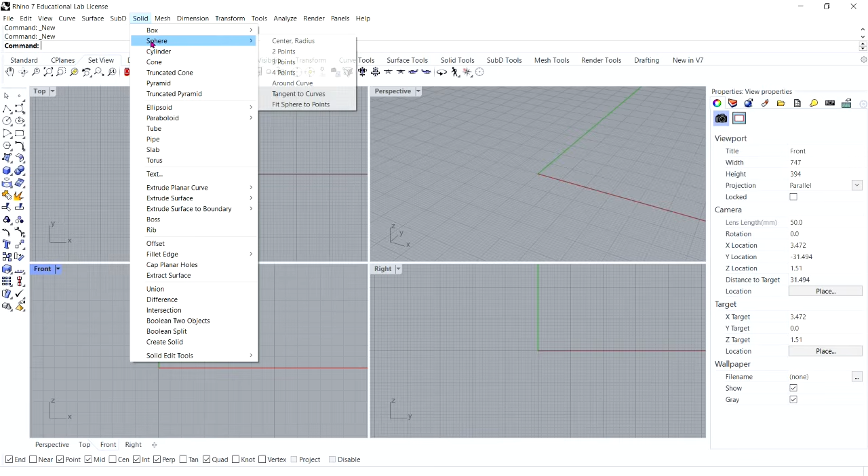So let's go ahead and begin in our front viewport. And you can either access the command from here, which is sphere, center, radius, or you can come up here and go to solid, sphere, center, radius. And in this case, for demonstration purposes, I'm going to start at the origin point with grid snap on, just to make my mirror command a little bit easier later down the line.

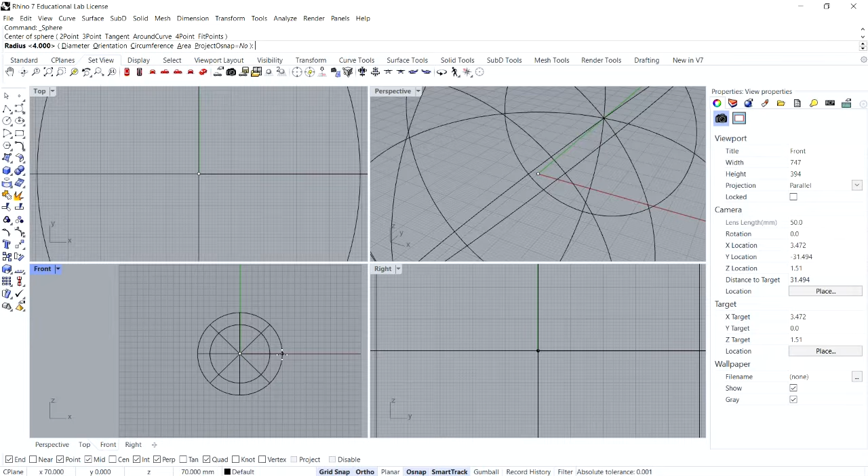Now, the exact size doesn't necessarily matter. That's kind of case-by-case basis. And I'll go ahead and take this to rendered in my perspective viewport so I can see what's going on. And here I'll go ahead and take that to shaded so I can also get a sense of the forms that I have going on right now.

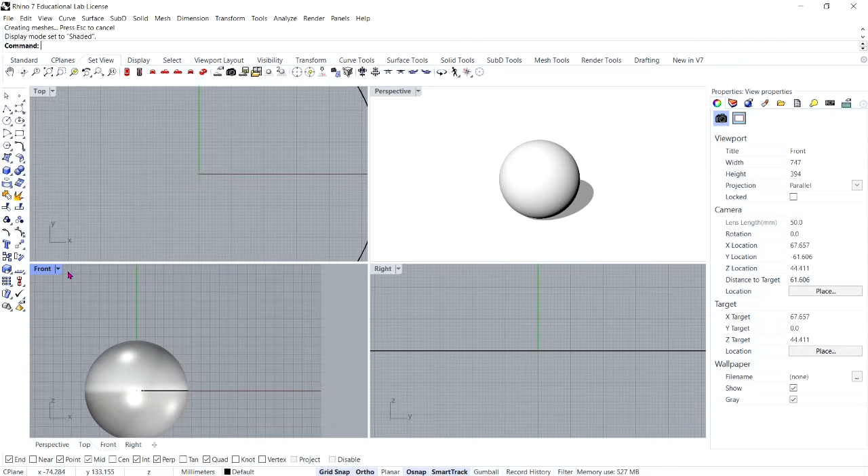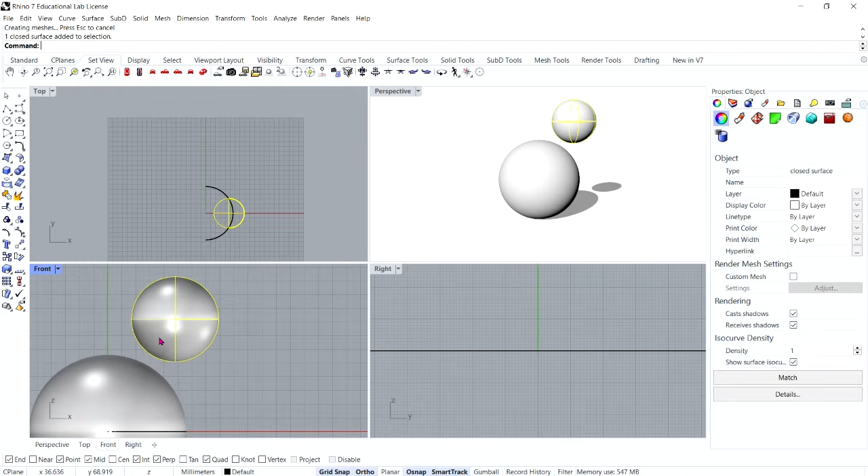And then my next step is going to be to repeat this procedure to create a second sphere. And my second sphere is going to be a little bit up and to the right. This is going to be the head of the duck. Like so. Okay, and then you can kind of see what you've done in your perspective viewport, and you might move things if you need to at this point, trying to get it closer to the body.

And I'm going to go ahead and use my elevator mode to make sure things don't move too far in the wrong direction. Okay, there we go. Now, the next thing we're going to do is to deform these spheres so that we can kind of mold them digitally to take on the physical properties of this rubber duck.

So now go ahead and select both of your spheres. You can multi-select with Shift, and then go ahead and go to the Edit menu and select Rebuild. And in your Rebuild Surface prompt box, you're going to change the point count to 8 for both U and V. Like so. And then go ahead and change the degree to 3 if it isn't already set for U and V as well.

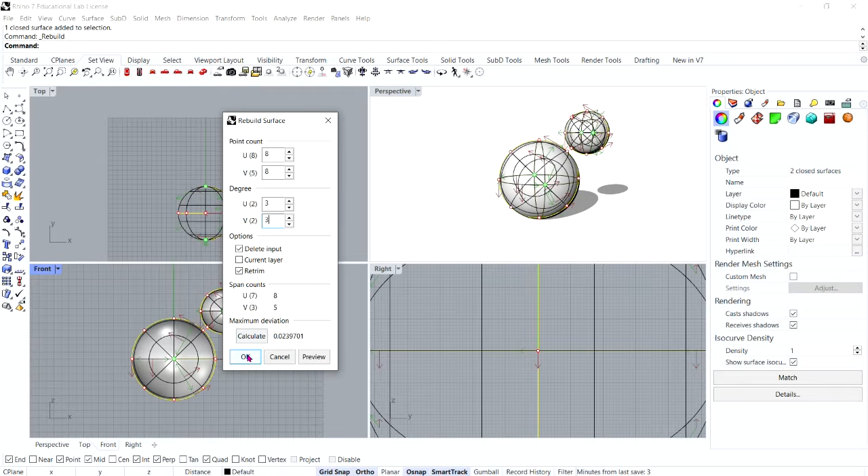Next, check Delete Input, clear current layer, and then click OK. There we go. The spheres are now deformable. Having more control points allows more control over smaller parts of the surface. A degree 3 surface will have a smoother shape when deformed.

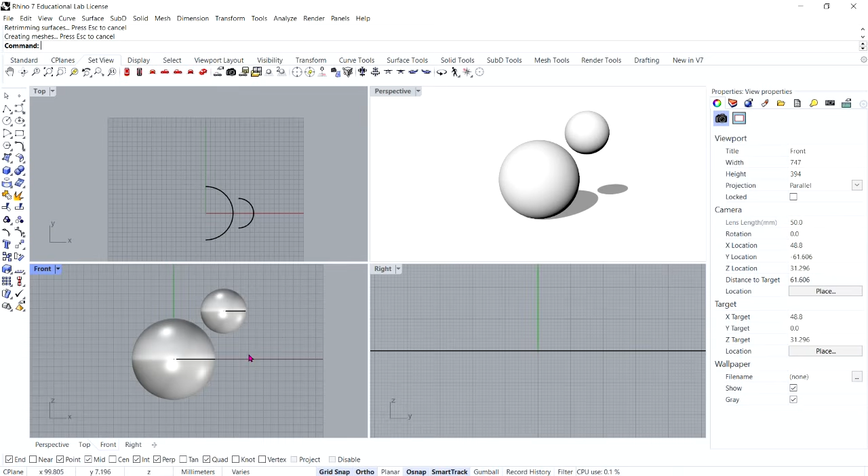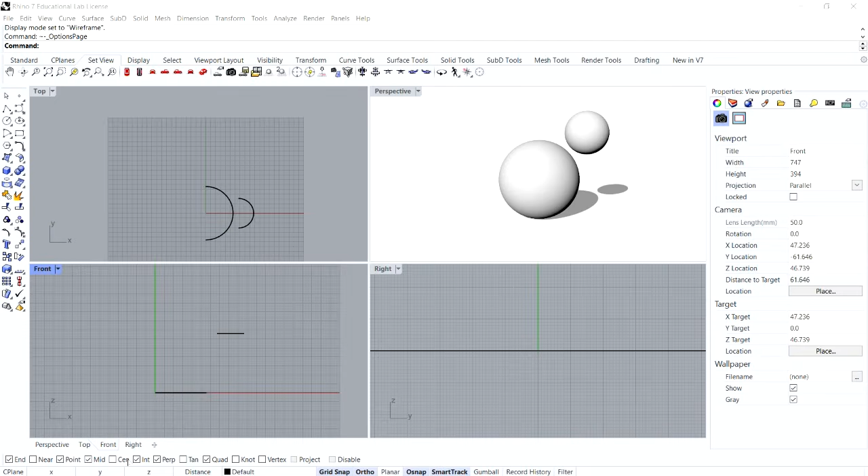All right, now I'm going to go ahead and work in my front viewport, and I'm going to change that to wireframe. And it's important to be able to see the ISO curves for the following steps. So if you don't see them, what you can do is click on the pull-down menu in your viewport title bar and scroll down to Display Options. And once you get your Rhino options dialog box, make sure show ISO curves is checked, and then hit OK. And now you can see those ISO curves that again are going to be important for the following steps.

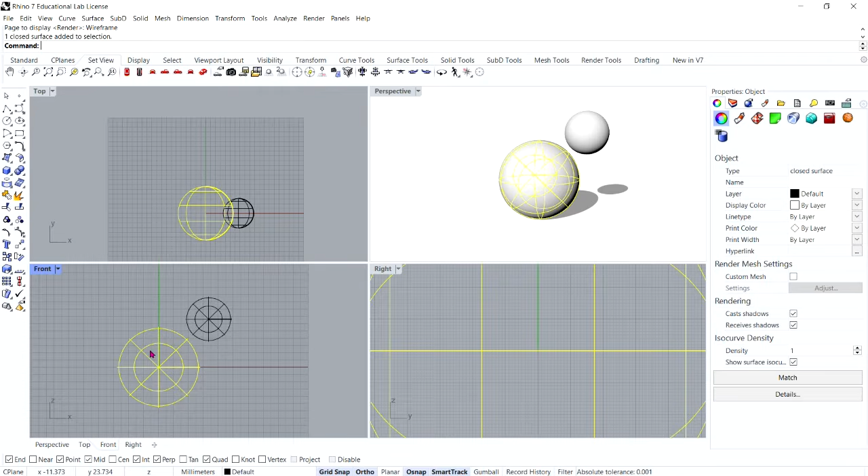All right, so let's go ahead and select the large sphere. And then from our edit menu, click control points. And here we want them on, so go ahead and turn control points on. And notice the shortcut key for control points is F10. All right, so now we can clearly see our control points for our larger sphere.

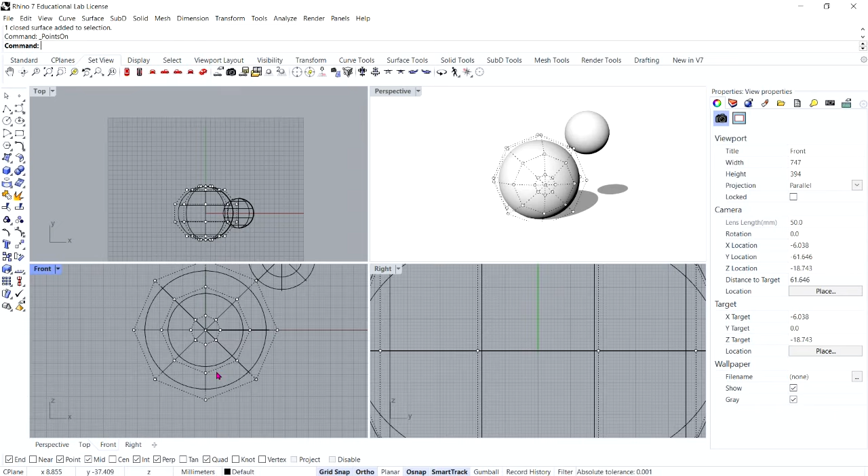Now, in the front viewport, select the control points near the bottom of the sphere. And you can do this with a window selection like so, and select all of the control points, once again, that are near the bottom of the sphere. So do not grab the control points that exist in the exact center.

Now let's go to the transform menu. And now click set X, Y, Z coordinates right here. In the set points dialog box, check set Z, this one right here, and align to world like you see here. And then go ahead and uncheck set X and set Y, and then click OK.

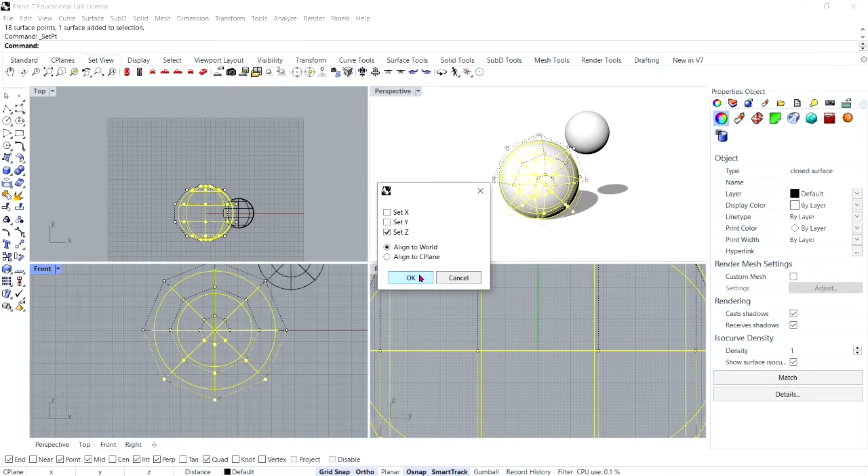Now you can go ahead and drag these selected control points up, and you can snap to one of the uppermost selected points like you see here, right? And now we've essentially flattened the bottom of that sphere.

All right, moving on. Now I'm going to go ahead and turn off the control points: Edit, Control Points Off. And the next thing I'm going to do is scale the sphere shape in one dimension. I'm going to make it larger. So I'm going to go ahead and select my larger sphere, and then from my Transform menu, I'm going to select Scale 1D.

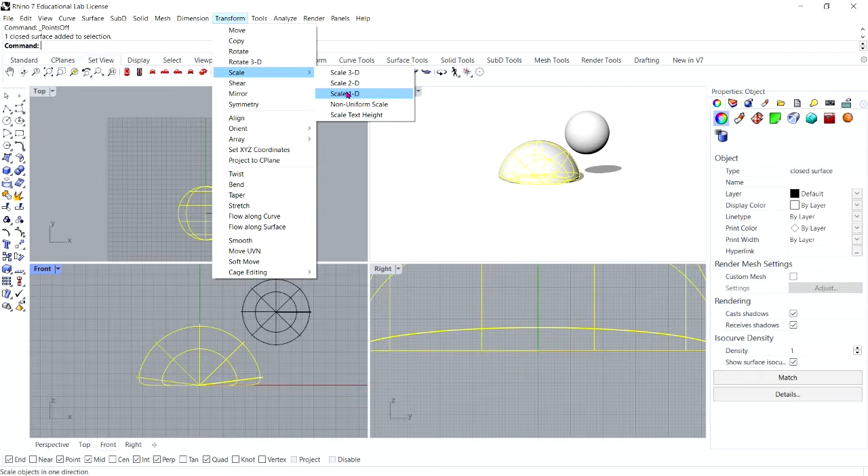For the origin point, pick a point near the center of the body of the sphere. For the first reference point with ortho on, so make sure ortho is actually on, pick a point to the right in your front viewport. And then for the second reference point, pick a point further to the right in your front viewport to kind of stretch it out like you see here. Get a little bit larger, like so. Now you'll see the body is shaped like an ellipsoid.

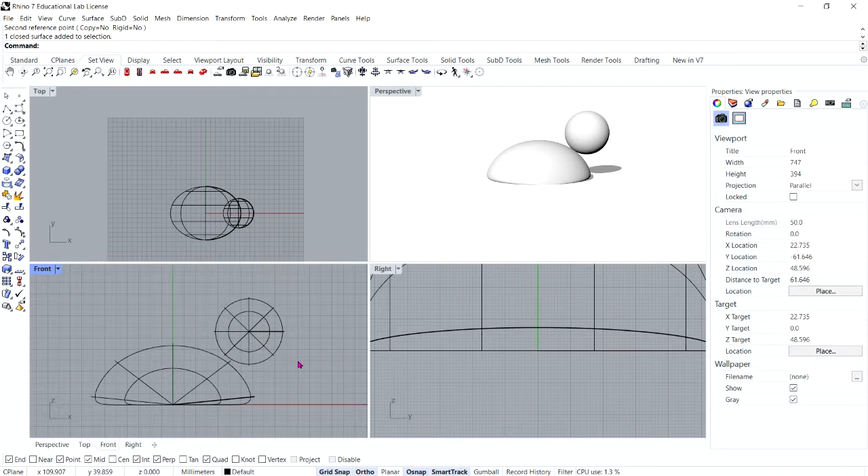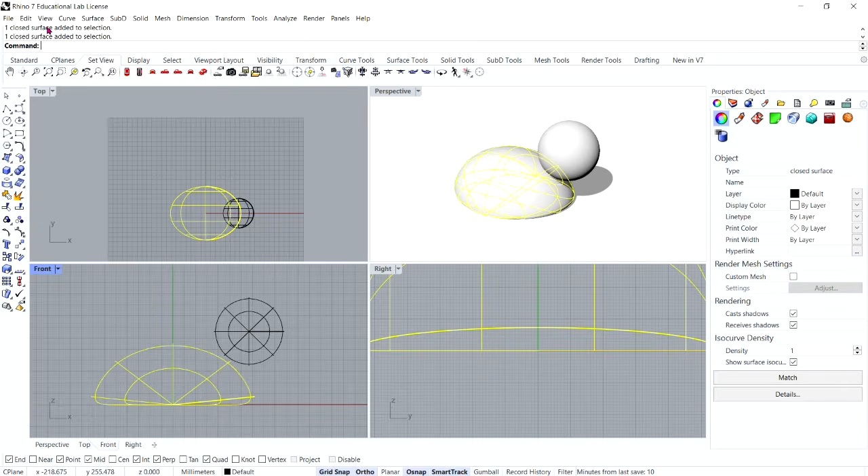All right, moving on. Now we're going to reshape the chest and the tail. And notice as I'm working that I'm keeping my perspective viewport open so I can clearly see that things are being modeled as I intend them to be modeled. So once again, turn your control points on. Select your large sphere on the bottom, and then Edit, Control Points On.

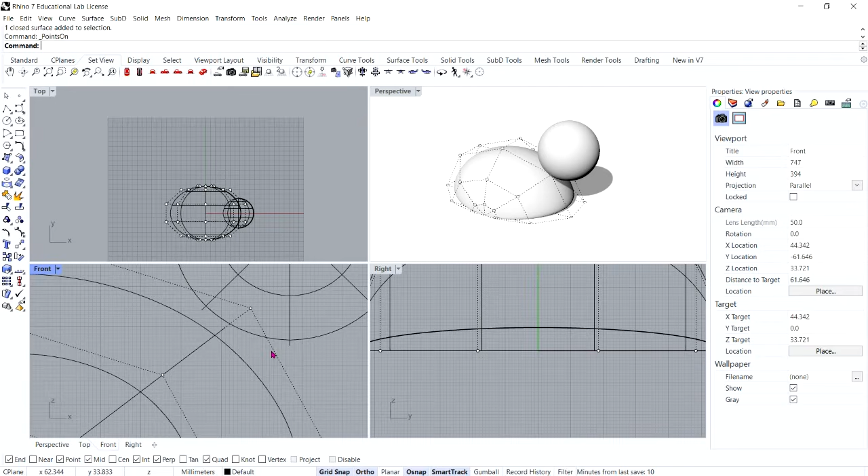Now you're going to window select the control points at the top right of the body, and you're going to drag them to the right to bulge out the chest. So you're going to do a bit of a window selection here to grab those control points, and I accidentally selected the smaller sphere on top, so I'm going to deselect it using Control. And now drag them to the right to bulge out the chest of this rubber duck.

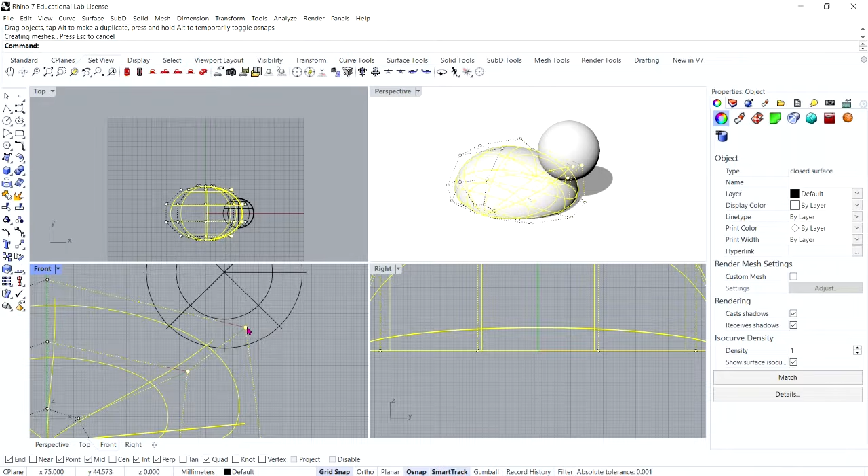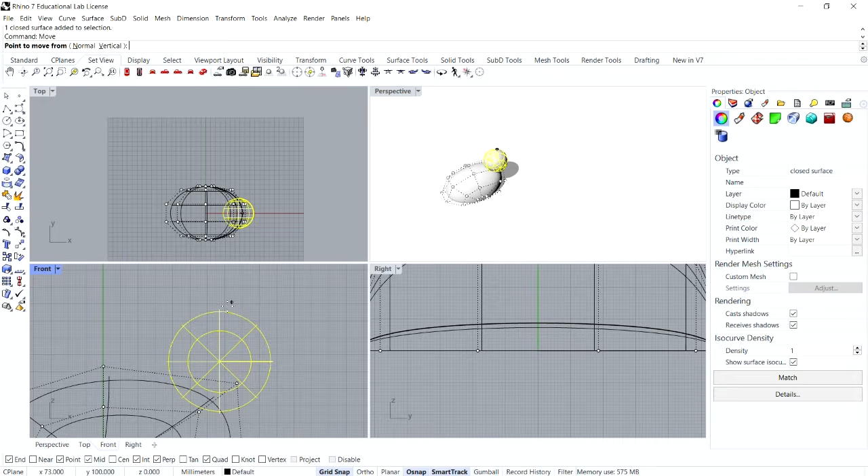And my ortho is on, so I'm going to turn that off so I have a little bit more liberty here with my movements. There we go, and I'm going to check to make sure everything is copacetic in my perspective viewport. Okay, we're good. Now I'm going to move this guy around just a little bit so it's not going directly into the body of the duck, and turning ortho back on to make sure I don't lose my alignments.

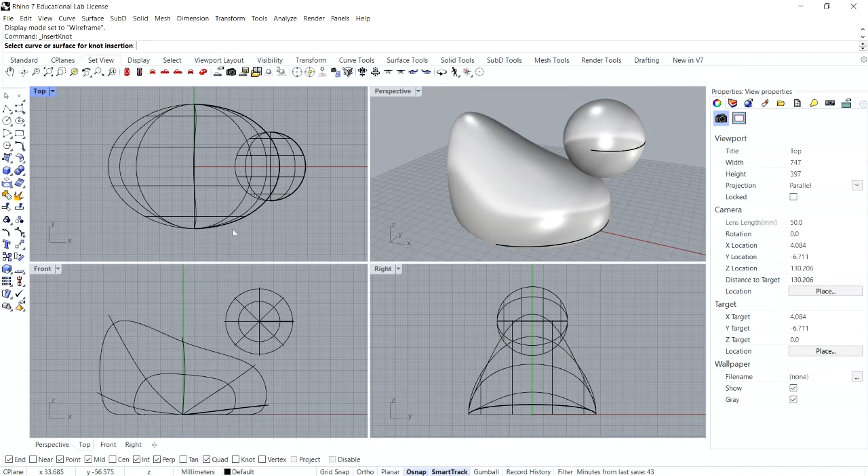Next, we are going to be adding control for further shaping the tail. Before we start to edit the tail further, first we're going to need to add an additional set of points to the tail portion of the body. So from your Edit menu, select Control Points and then Insert Knot. For the surface for knot insertion, pick the body surface, like so. And you're going to want to make sure that you're inserting this in the V direction.

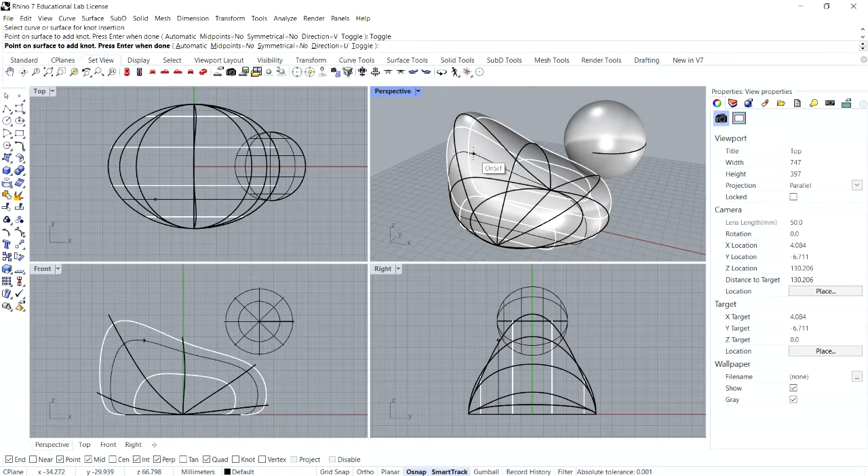It's highlighted right now as white. If it's not, yours might look like this, and you'll see the direction has changed. So we need to make sure that it is actually going in the V direction. So change the direction if necessary until it reflects what you see here on the screen. And then pick a point that's midway between the tail and the center of the body, just like this. And then right click to finish the command.

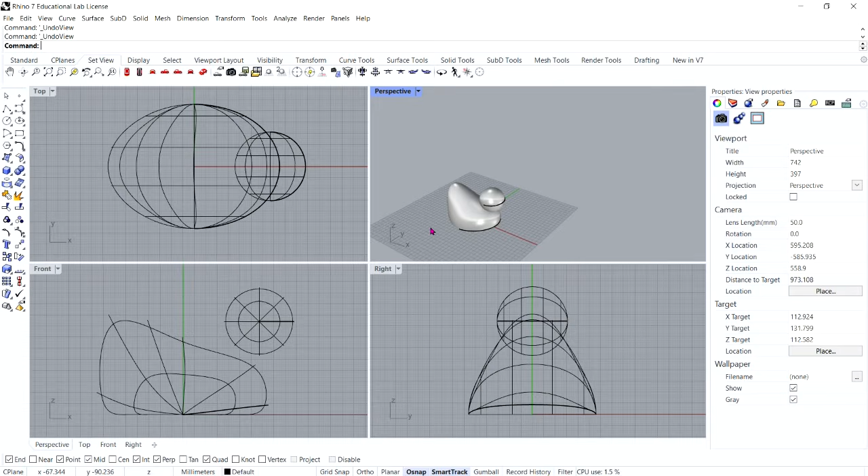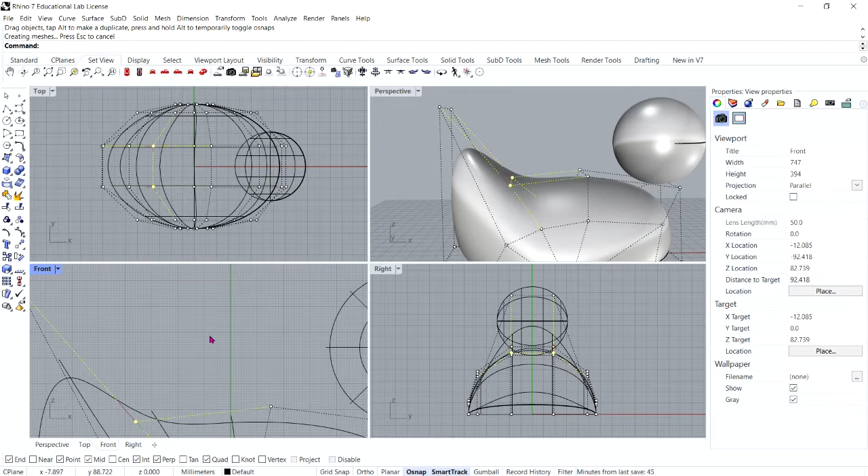Now we can turn on the control points to see where they have been added. So Edit, Control Points On, select objects for control point display, and there you see now we have 2 additional control points, which now can be window selected and dragged down and pushed in, again, to further shape the tail.

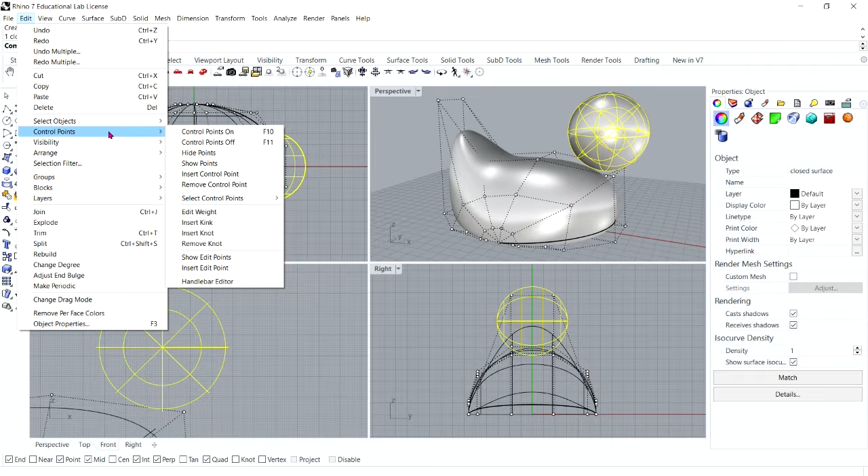Next, we're going to deform the smaller sphere to create the head. So let's go ahead and work in our front viewport and select the smaller sphere. And let's turn on those control points: Edit, Control Points On. Now select the control points on the right side and drag them to begin forming the bill, like so. There we go.

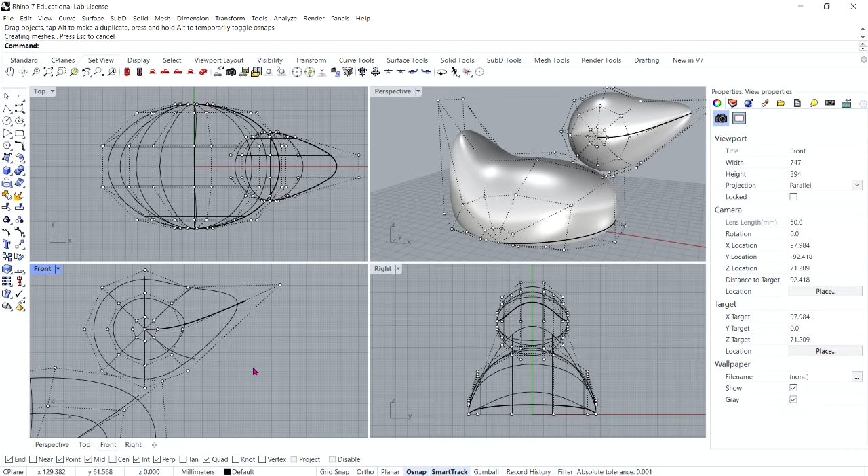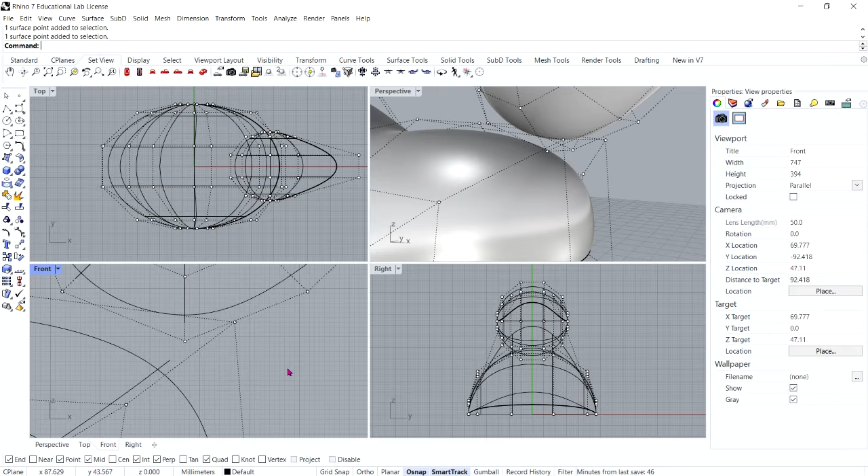And remember, it's important to window select these control points because there isn't just one. If I were to just select this one control point, it can be deceiving. If you select it in perspective and you don't do a window selection or a multi-select holding down Shift, you might only be grabbing one when your intention might be to grab all of them all the way through. And once you're done, you can hit Escape to turn all of your control points off.

Now, before I move forward, I would really like to massage this form a little bit more. So I'm going to move the head of this duck a little bit further down and to the right. Like so. There we go.

Next, we're going to separate the bill from the head. For the final rendering, the bill must be a different color from the body. To do this, they must be separate surfaces. You can split a single surface into multiple surfaces many ways. The following technique is just one.

So in the front viewport, I'm going to create a curve that I'm then going to use to split the bill from the head of the duck. I will be using the interpolate points curve. And you're going to want your curve to look something like this.

I'm going to push this one a little bit more. There we go. So you want a curve that looks something like that. Again, this is a very free-form exercise. It doesn't have to be quote-unquote perfect, right?

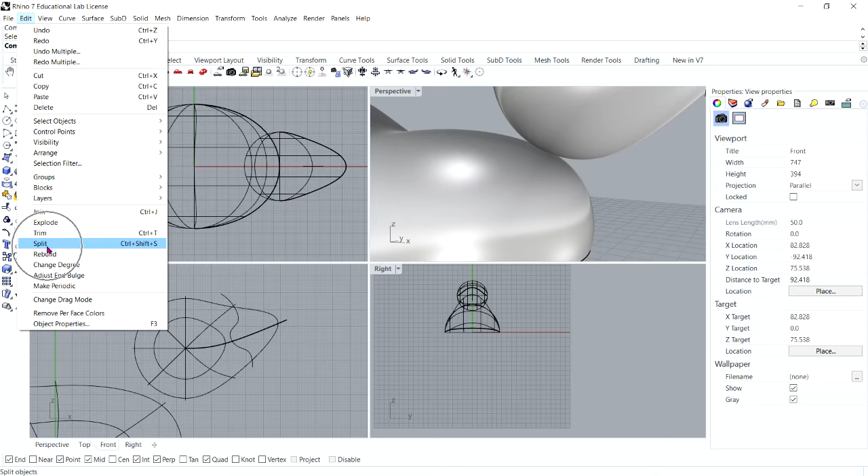Now we can go ahead and run the split command. Edit, split, and select objects to split. Go ahead and select the entire head, and then enter when done, and then go ahead and select the curve for the select cutting objects prompt, and then enter or right click when done. And now you'll see the surfaces have in fact been separated according to this curve.

Next, we're going to create the duck's neck. First, we're going to make an edge on the surface of the head, and then we're going to make a corresponding edge that's parallel on the surface of the body, so that we can then create a blended surface between these two edges. So I'm going to begin by drawing a line on the top portion of the body, like so.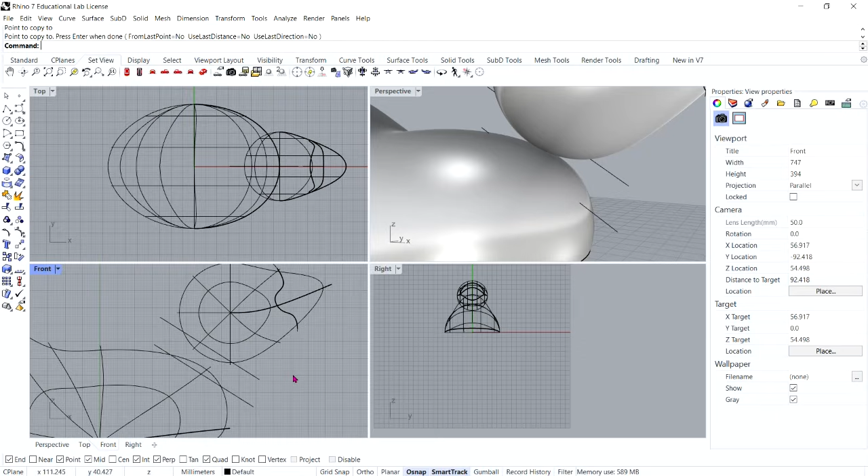And I'm going to copy this line to the bottom of the head, making sure it does in fact intersect the surface, like so. Now, select the lines, and we're going to trim these surfaces using those lines. So go type in trim, enter.

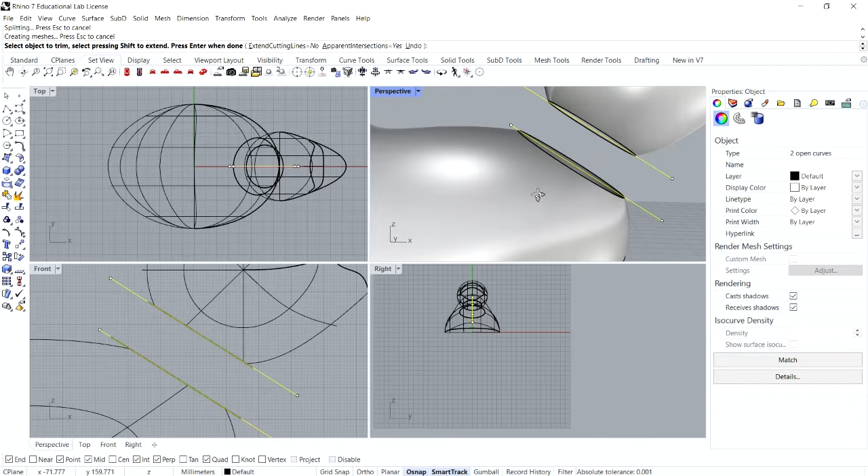For select object to trim, select the top of the surface of the body and the bottom of the surface of the head. And you'll notice what has happened in your perspective viewport. Should look like this, or something very similar. Okay.

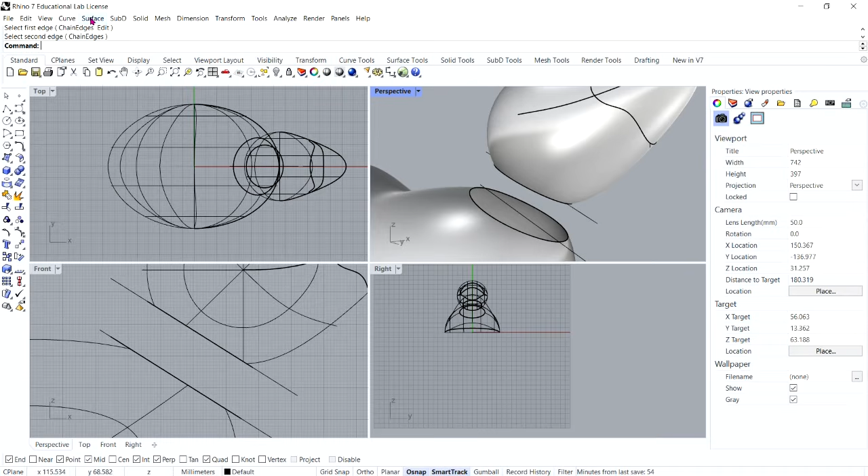Next, we're going to blend the surfaces between the head and the body. So go ahead and hit escape to deselect everything. So from your surface menu, go ahead and select blend surface. For the first edge, select the bottom of the head. For the second edge, select the hole at the top of the body. And then press enter or right click when done to move on to the next stage.

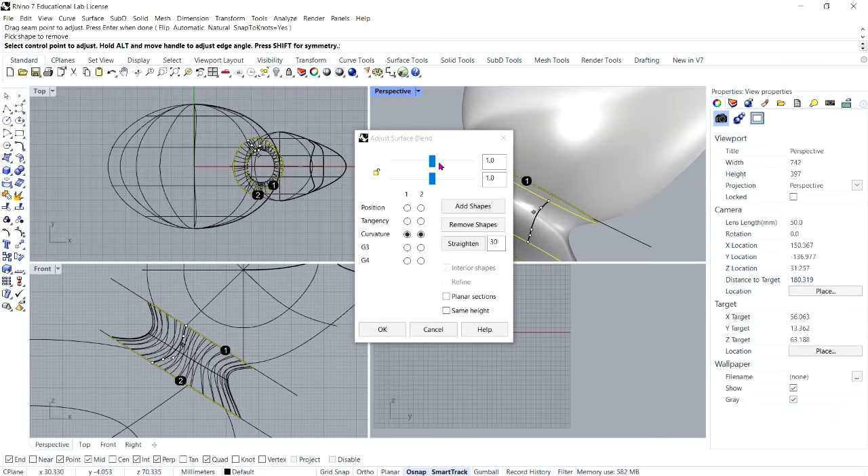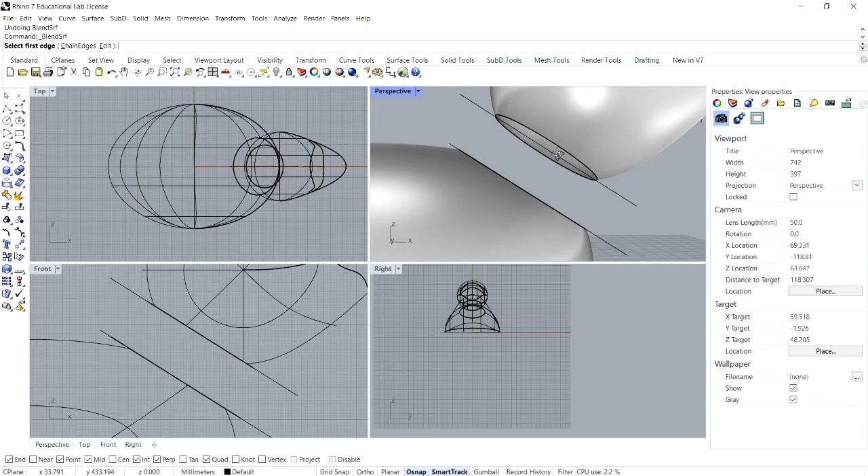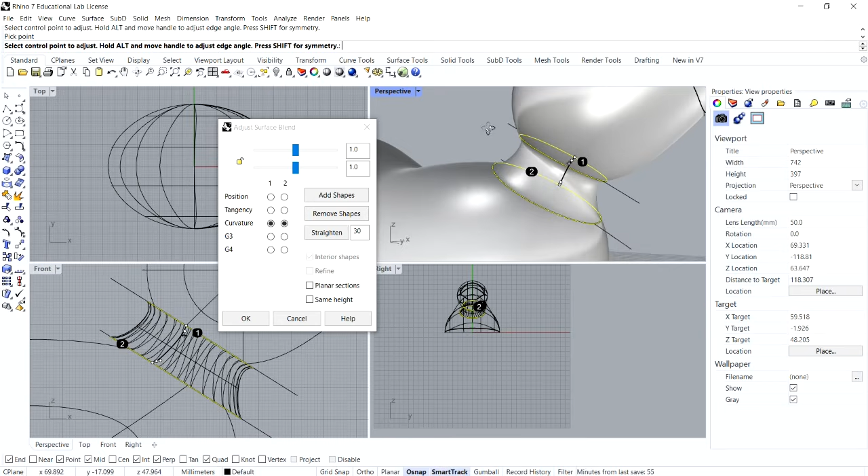And here you can see a preview of what's going on. Your default settings for the most part are okay, so you can hit OK. And if you need to, let's say you have a little bit of deformation. So let's go ahead and reselect the edges. Here in this stage where you see this prompt box for adjust surface blend, this is where you can click and drag to pull these curves to give them a little bit more definition, like so. And then you can go ahead and hit OK to finalize that command.

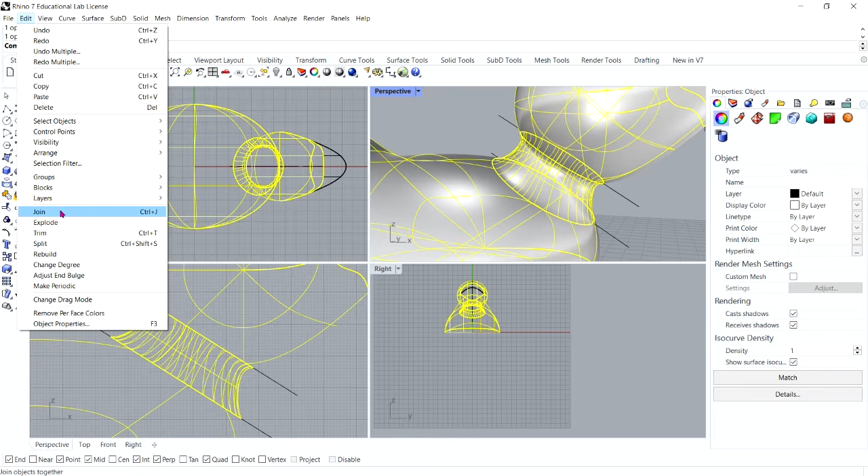Now we're going to join the parts. Go ahead and select the body, the blend surface, and the back of the head. From the Edit menu, select Join. All three surfaces are now joined into one, and the bill is left separate for rendering purposes.

Next, we're going to make the eye for the rubber duck. For this part of the exercise, we're going to make a curve and revolve it to get the surfaces necessary for the eye. For this part of the exercise, I'm going to be working in front viewport. Now, I'm going to turn on grid snap. That's going to be very helpful for these next few steps. And the first thing I'm going to do is create a conic curve. So you can go to curve and select conic.

Now, for the start of your conic, you're going to want to think proportionately. Remember, we're making an eyeball here, right? So you don't want to do something extremely large. Think of making a curve that's about half the size of the eyeball that's proportionate to this rubber duck. So here we go. I'm going to start by making a click here. One click. That's click one. And move up and over to create click two.

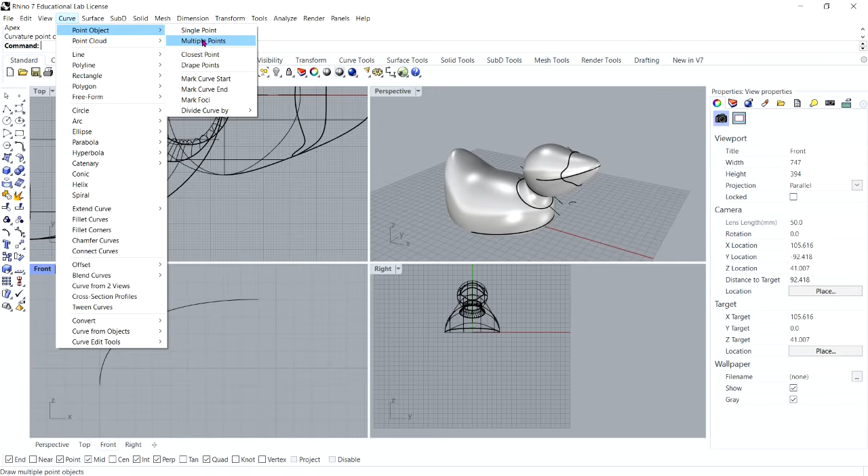Next, we're going to place some points as almost like reference points. So we're going to go to curve, point object, multiple points. And you're going to want to place a point here, and then Smart Track will be very helpful to make sure you're actually catching the end of the conic curve in that intersection. And then that's where I'm going to make my second click. And now I have 2 points dropped in place.

Next, I'm going to split the curve. Much like we had to split the head from the bill of the duck, the same thing applies here, so we can separate the iris from the eyeball. So we're going to create a line, just a traditional polyline, and then for the purposes of this portion of the exercise, I'm going to turn off grid snap, so I have a little bit more liberty, and I do want it to be an orthogonal line. So I'm going to turn on ortho, like so.

And now I'm going to actually split the conic curve with this orthogonal line. So I can type in split into my command bar. Select the conic curve as the object to split, and then the orthogonal line as the cutting object, and then enter or right click when done. And now you have split the conic curve in two.

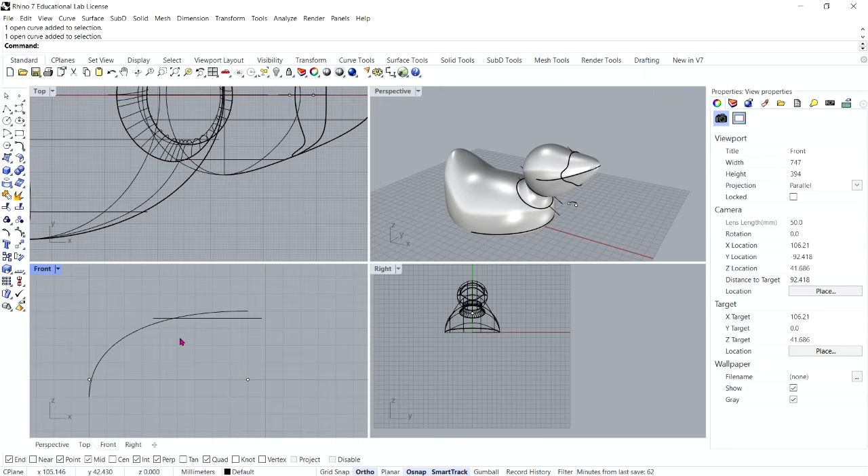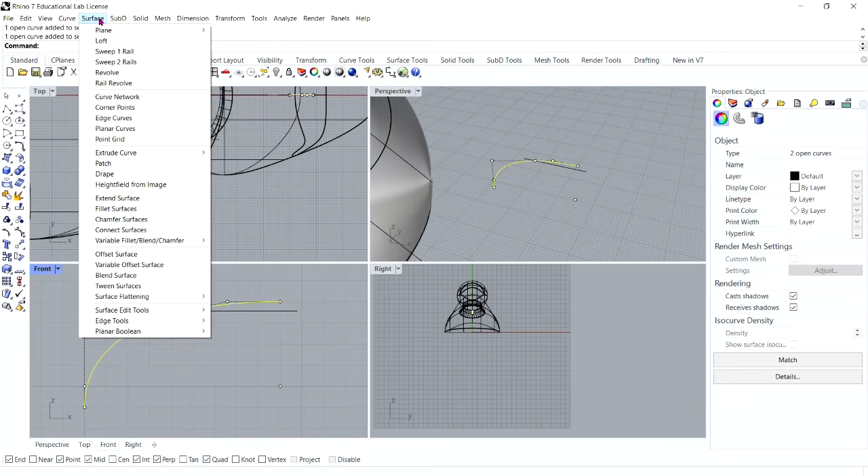I'm going to move over a little bit in my perspective viewport so I can see what's happening as I move forward into the revolve command, which will produce a three-dimensional result. So select both parts of the conic curve, and from the surface menu, click revolve. Surface, revolve.

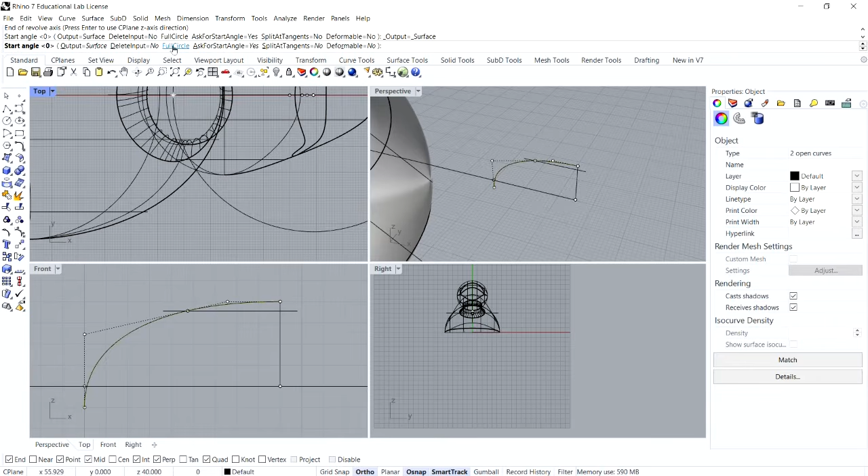For the start of revolve axis, click the point that you created. For the end of revolve axis, pick the top end of the conic curve. For the start angle prompt in your command bar, click full circle. And there you have essentially the eyeball.

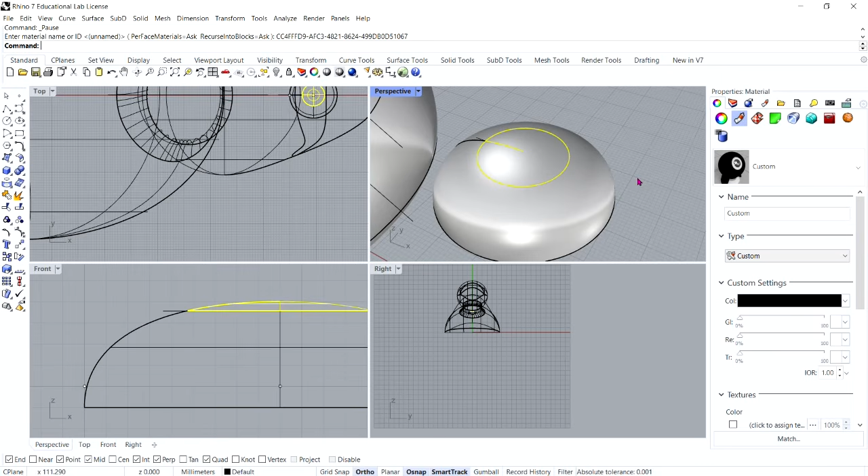Now let's assign a material color to the eyeball. Let's go ahead and make that black. So let's go to our materials panel and use a new material. And go ahead and change the custom settings to the color black. Okay, there we go. And if you go to rendered, you'll be able to see the material changes that you have made.

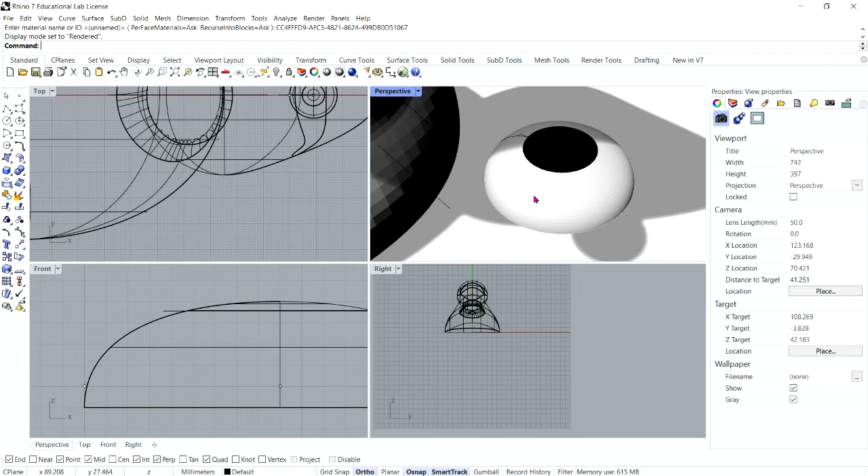Now we're going to actually place the eyeball on the head. So in our top viewport, select both parts of the eye. And then from your edit menu, go ahead and click groups and then group. Edit, groups, group. And remember, you also have the option to type these commands directly into the command bar. And now you'll see that these two parts of the eye are grouped together.

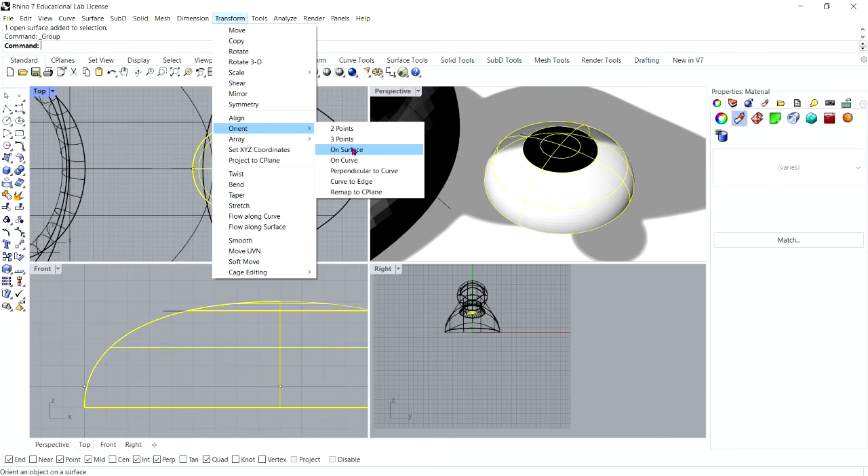Next, go to your transform menu and select orient on surface. For base point, snap to the point at the center of the eye. So you might want to make sure you have your center OSnap on. In case you don't, go ahead and turn that on so you can accurately catch that center OSnap.

And for reference point for scaling and rotation, snap to the point at the edge of the eye. Oh, I might have better luck catching it. Hold on. I think I have too many OSnaps on. Bear with me. Let me turn some of this stuff off. There we go.

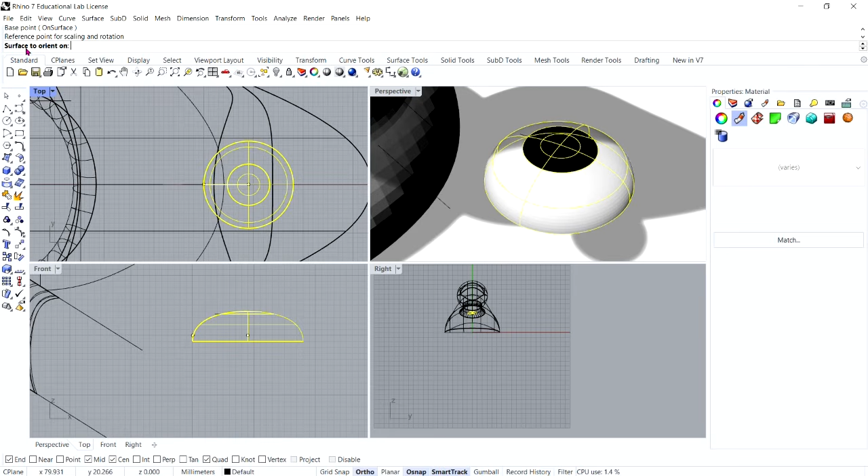Next, my command bar wants to know surface to orient on. Go ahead and pick the head. And you're going to get an orient on surface dialog box. In this dialog box, for scale, check prompt and rigid, like so, and then click OK.

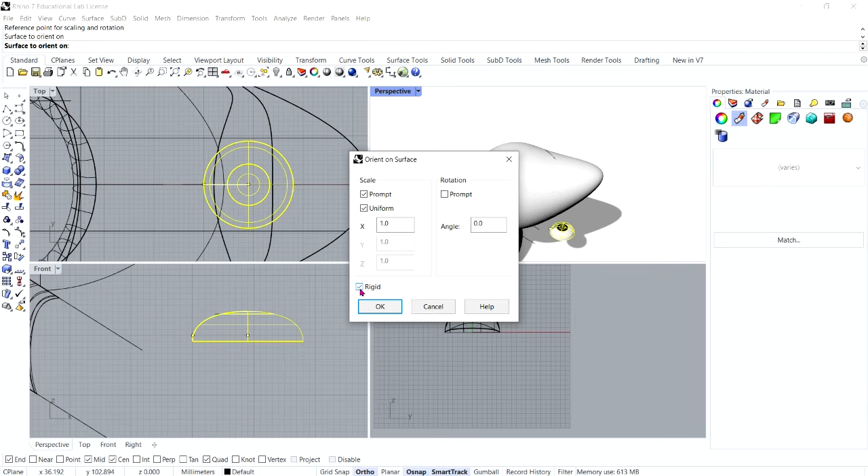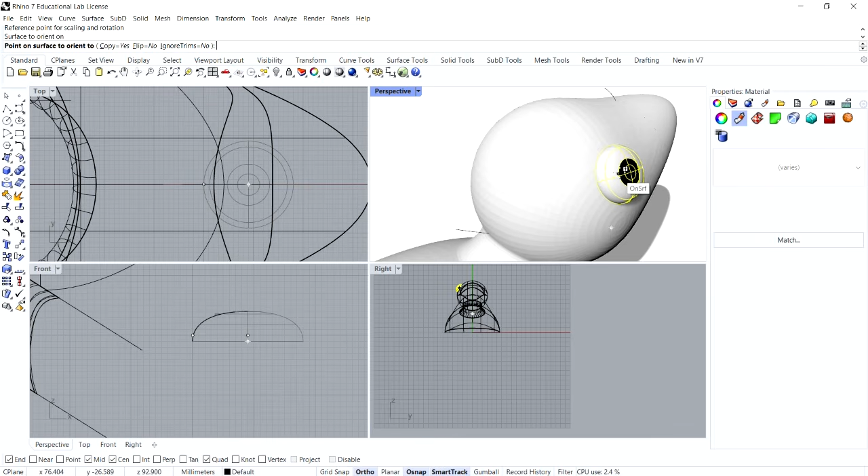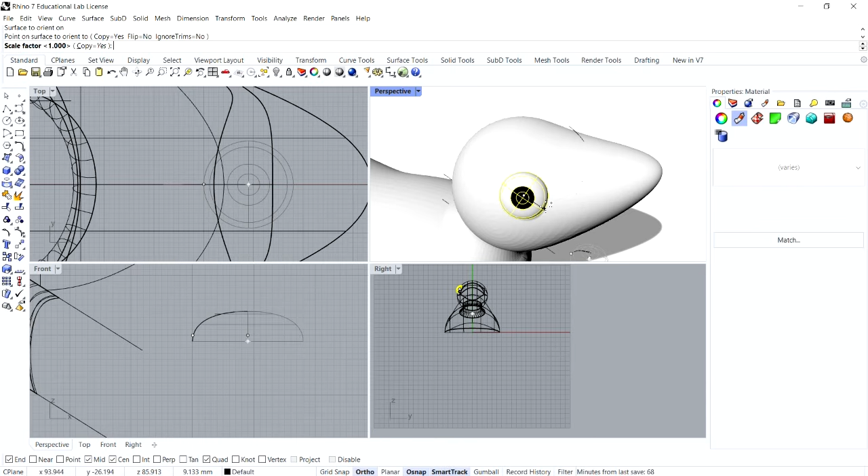And now, when you move your mouse over the surface of the head of the duck, you'll see that it will place it rather nicely onto that surface. So go ahead and pick a spot to designate the location of the eye for this duck. And keep in mind, you also have one more step here, which is the scale factor. For the scale factor, you can drag your mouse and stop and click once you have a size that you find satisfactory, like so. And there we have one eyeball on the rubber duck.

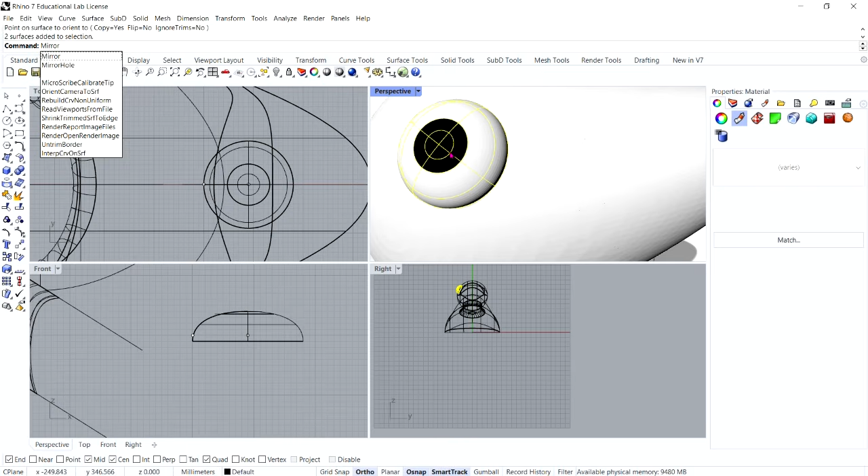Now we can go ahead and mirror the eye to the other side of the head. Select the eye and type in the command mirror in your command bar. And remember, from the very beginning, I made my model from the origin point. So in this case, I can mirror directly from there, like so.

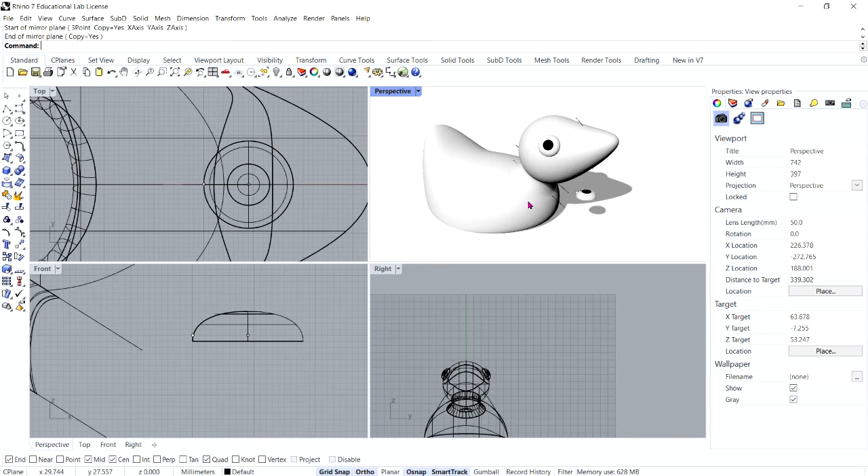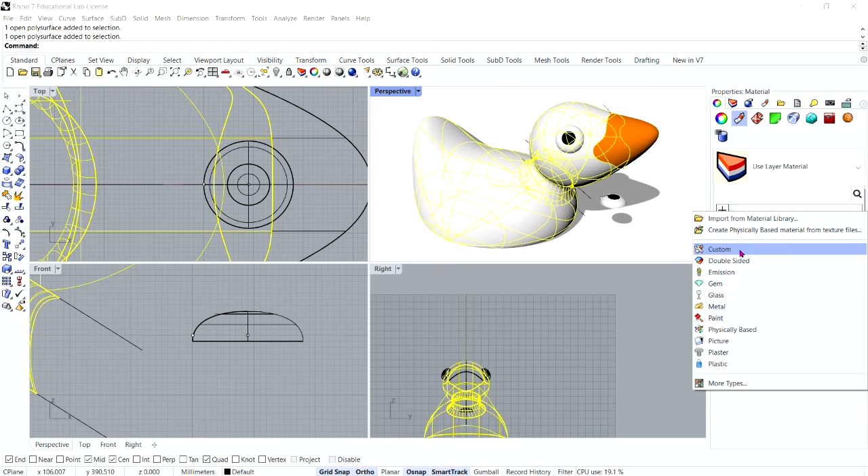Next, we can add some material properties to the bill. Let's go ahead and make the bill orange. And the body yellow. Oh, there you go. Like so. All right.

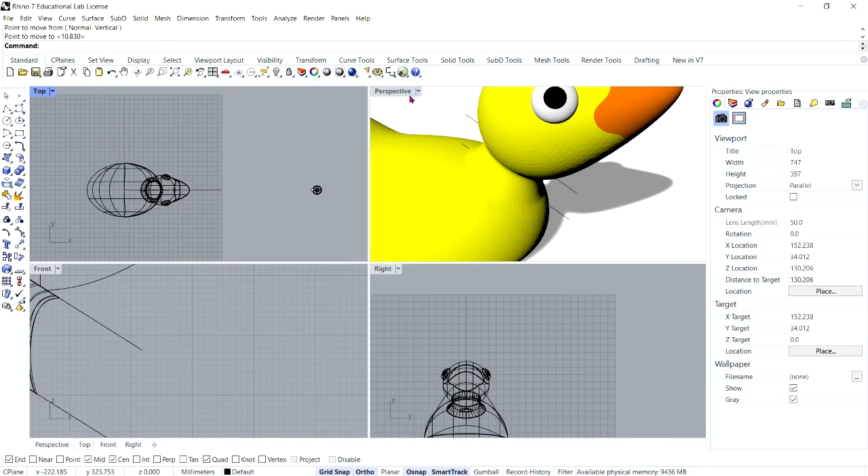Now, lastly, we can run a rendering. Going to move this out of the way so it's not in the way of my rendering. You can also delete it. It's entirely optional. And I'm also going to delete these reference lines that were used in the exercise. And render. Render.

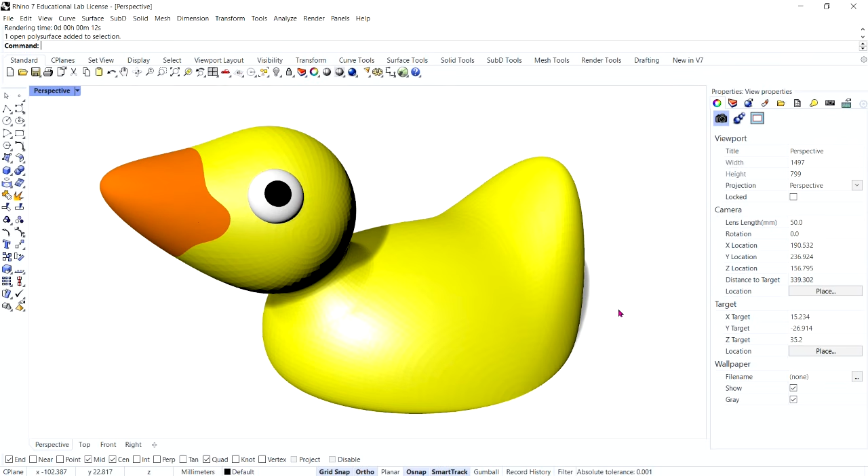All right. And lastly, keep in mind, you also have the option, as always, to go back to your material properties and add some, say, gloss, or maybe some reflective properties or transparency to your materials. Render, render. And you can play with the material properties, the glossiness, etc., until you get the most favorable results. And that concludes exercise 55.